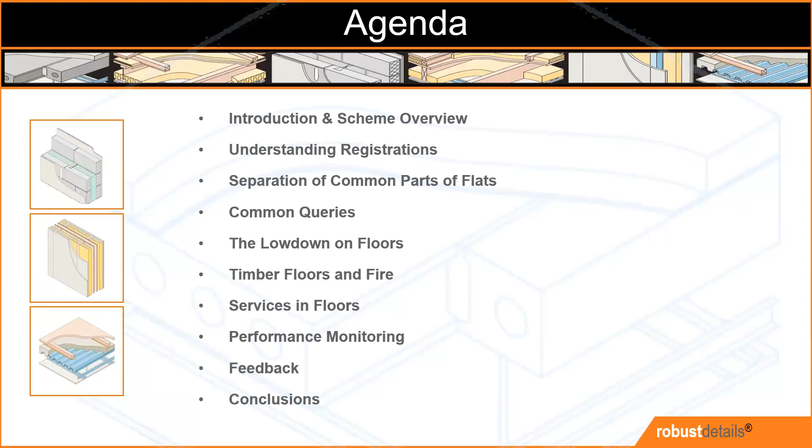So what are Robust Details? The Robust Details scheme standards are based around an average performance improvement of 5 dB over the minimum building regulations compliance standards recommended in Approved Document E, by testing an as-built system for conformance and conducting ongoing performance monitoring. Robust Details are able to offer an alternative to the pre-completion sound testing regime.

So the scheme can be used for newly built adjoined dwellings and flats only. It cannot be used to evidence compliance for conversions or extensions, and also not for student accommodation or care homes, unless they are categorized as flats in the building control purpose group assignment, commonly found in Approved Document B for fire safety. It covers Part E in England and Wales, but the same scheme can be used in Northern Ireland, as they have the same performance standards. There's a separate scheme for Scotland, as they have different performance standards. To give an idea, there are 69 details for England and Wales, and only 13 for Scotland.

This is a complementary service, so building control still needs to go to site to undertake the checks, as they would for any other aspect. We do go to site from Robust Details, but this is only to check that the details are performing so the scheme remains fit for purpose. While on site, we can do a bit of knowledge transfer, so we can tell the builder what he needs to do to comply with the detail, but we are not licensed or authorized to check for building regulations. It is still very much the job of building control to check compliance. And by that, I mean the plots have been registered and the construction meets the specification.

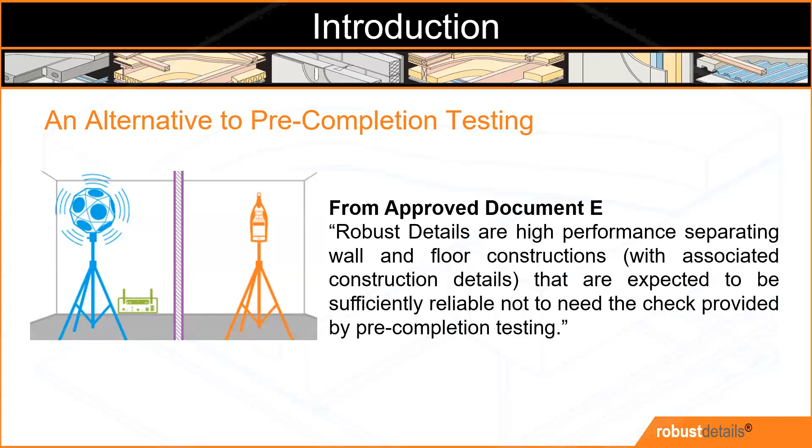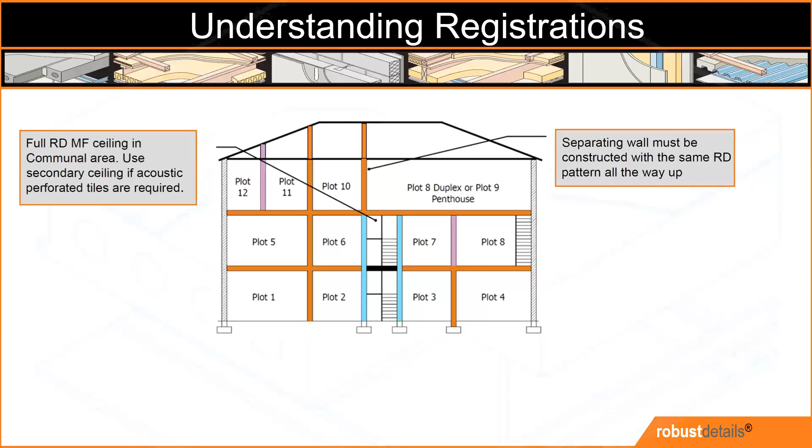So here we have an example. In a block of flats, we can expect to find other separating elements, which also need to perform in respect to the passage of sound, such as floors and walls between communal areas and the flats. These cannot be registered, but may sensibly be built following the robust detail specification to ensure we provide reasonable resistance to the passage of sound and also meet the flanking requirements at junctions with registered separating elements.

This diagram shows in orange those walls and floors subject to requirement E1 that can be built as a robust detail. Those in blue are walls to which the requirements apply. These could be built to a robust detail specification, but not registered. In this example, we also show walls in pink that are not compliant with the scheme standards due to their flanking conditions with separating floors.

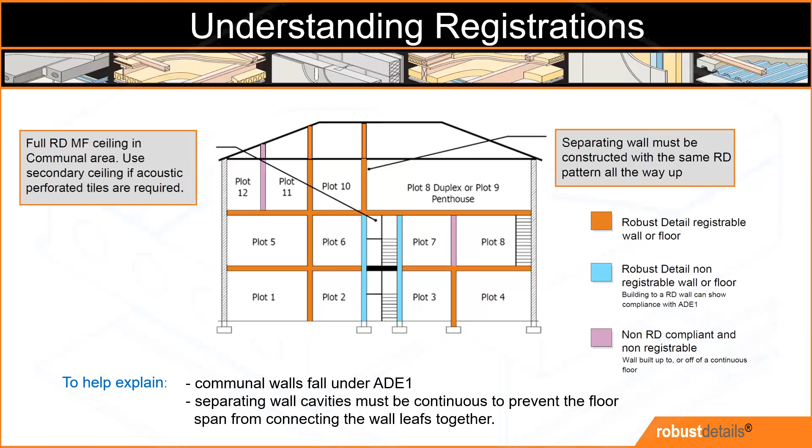Plots 7 and 8, as you can see, have walls that terminate at the underside of the separating floor, so it cannot be registered and instead should be subject to testing. The same principle applies to plots 11 and 12, where the wall is built off a separating floor. The next slide explains this in more detail.

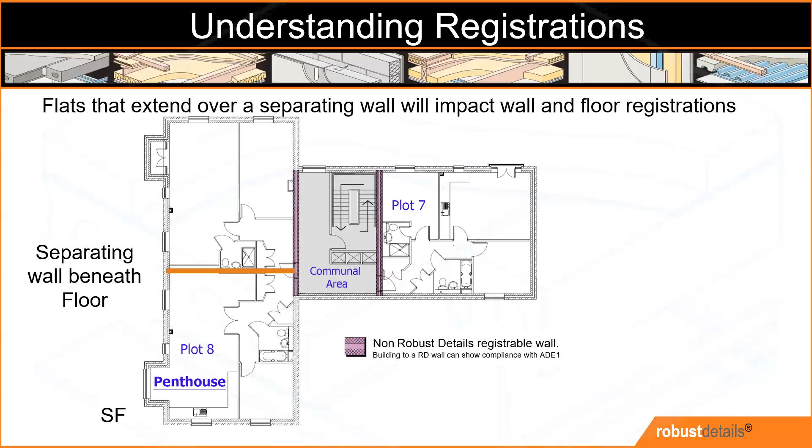As we just saw, a dissimilar layout between floor levels can cause situations where registrations to use the scheme standards is not possible. Separating walls with a continuous floor above are a good example of this. Here we have a top floor penthouse with a separating wall underneath. A floor which is continuous over a separating wall connects two leaves together. The floors can be registered with robust details, but you need to make sure the planks are tightly butted together and fully grouted.

By making our floor compliant and continuous above, we have, however, connected the leaves of our lower separating wall, introducing a flanking sound pathway around the wall. This wall cannot be registered and therefore needs independent acoustic design advice and testing.

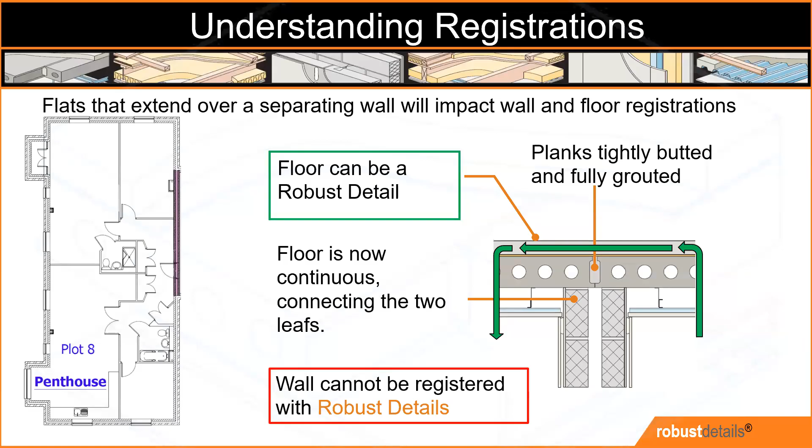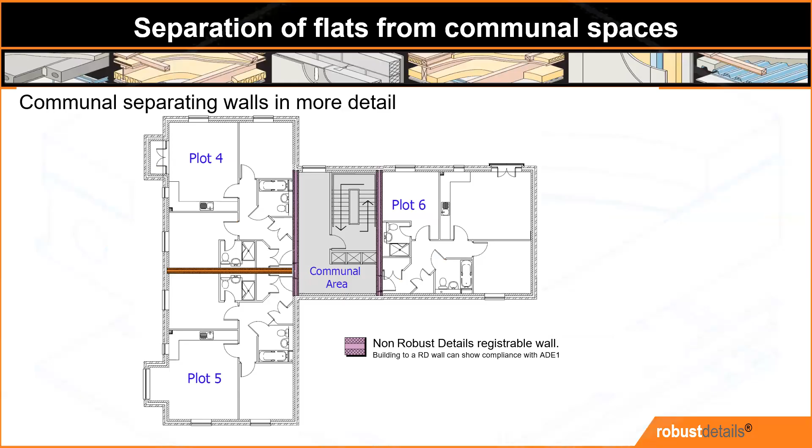So moving on to separation of common parts of flats. So there's a few misconceptions with communal spaces, which we'll talk about now. We mentioned earlier that separating walls between communal spaces and flats must meet a reasonable performance for resistance to sound, but cannot be registered with the scheme. The same principle applies to floors over the communal spaces.

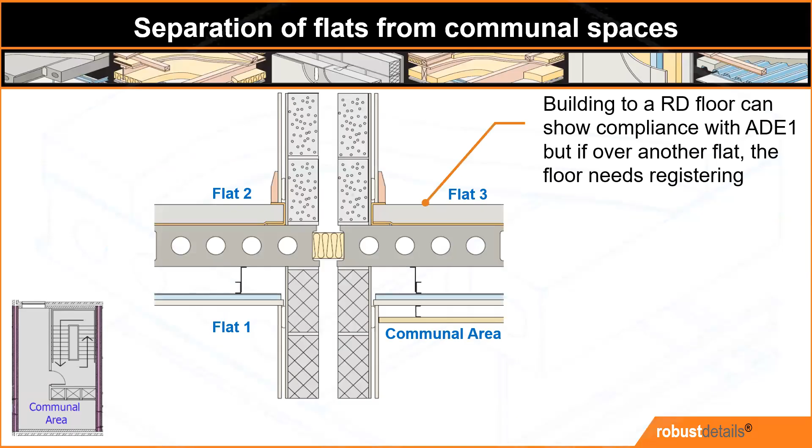Building a robust detail floor means meeting the flanking conditions at the abutment with walls, whilst also performing for sound resistance. Typically, we will need provision to limit reverberation in the common parts. Where this is applied to the ceilings, it should be in a metal frame grid mounted below the robust detail separating floor and not in substitute of any of the required ceiling treatments.

If a non-robust detail wall is used, it is imperative that the blockwork used meets the flanking requirements of the separating wall and floors. The example here shows that flat 3 extends above the communal area, therefore the entire floor needs to match the specification. As the separating floor has provided a natural break and protects from flanking sound, it would be possible to change to another wall type above the separating floor if desired.

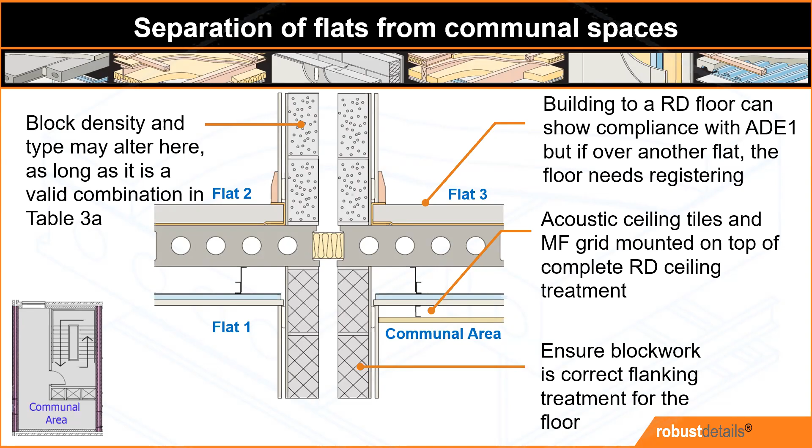Separating walls must be consistent between separating floors, but may change at these junctions, subject to compatibility being identified in Table 3A in the Robust Details Handbook. Right, at the beginning, we looked at the overall scope of the scheme and where it applies. Now let's look at some specific situations with common queries we receive in relation to these.

So mixed-use buildings. Requirement E1 says we need to protect against noise from adjoining dwellings and any other parts of the building, which would include the shops below. As we said earlier, robust details are for dwelling separation, so the podium deck between flats and shops would not be covered. You could then test this, but the shops are open plan.

The difference in sizes could make this difficult. If the noise from the shops is expected to be the same as from the dwellings, and the floor is built as if it was a robust detail, building control could consider this as evidence of compliance. Then we need to ensure that any walls built off the podium deck meet the robust detail requirements.

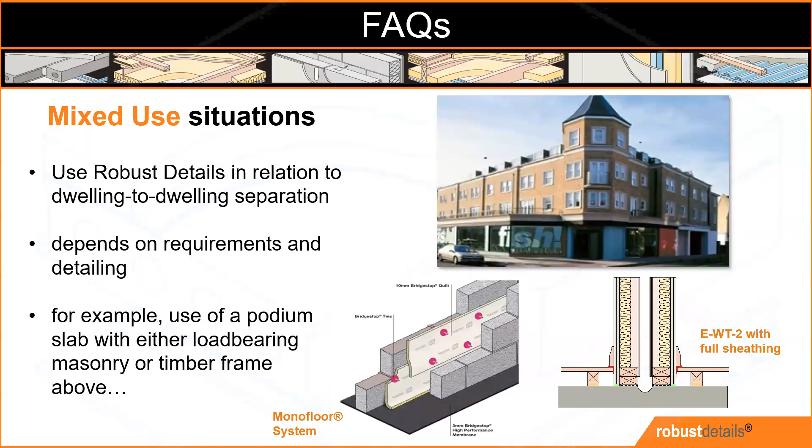Build a masonry robust detail separating wall off an in situ cast podium slab. We need to isolate the wall from the slab to prevent flanking sound transmissions. Appendix A2 in the handbook deals with the specific flanking conditions and includes a detail for using this Icopal Monarfloor Bridgestop system.

This consists of an isolating membrane between the slab and the wall and an acoustic quilt up one leaf of the wall for 2 lifts to mitigate against any debris forming an acoustic bridge across the wall.

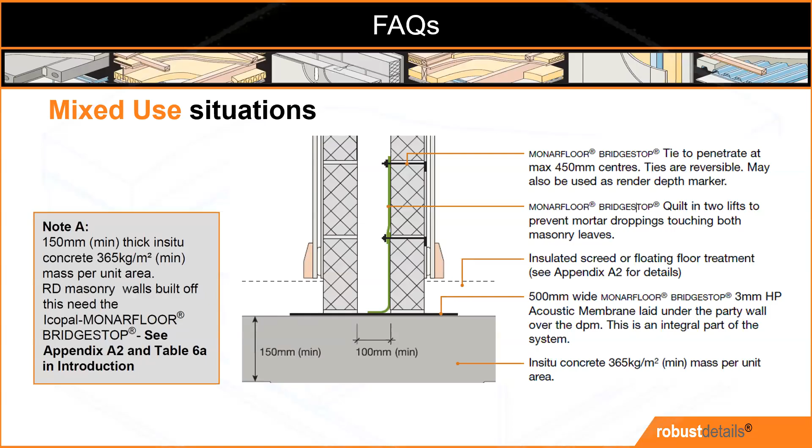Moving on to FOG units. This is a situation where there is a flat over garage that are different in ownership, so the floor is a separating floor. However, Part E doesn't mention garages, so building control bodies have to decide whether it's an external space or another part of the building where E1 will apply.

Because registrations are only applicable between dwelling plots, for a floor to be registered between a dwelling and the garage it would need to be demised to an identifiable plot registered with the scheme. In most situations, it would be likely that requirement E1 would be deemed applicable.

Keep in mind that to build a robust detail separating floor, the floating floor treatments and ceiling treatments specified must be installed. It is very difficult to conduct a sound test between garage and the flat above. So if an alternative to a robust detail is proposed, the method of evidencing compliance to building control will require individual consideration.

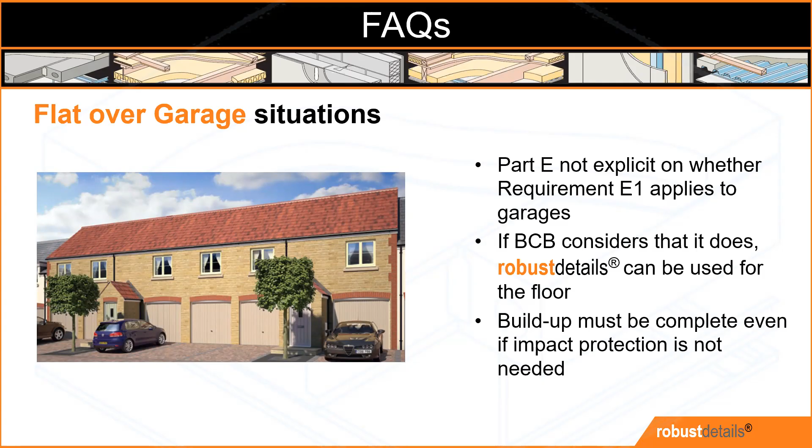Integral garages. If a wall is registered with robust details, as far as we are concerned, the whole wall has to meet the specification. With integral garages, there is a temptation to leave the finishes off, especially where gypsum board is required. If this is done, the wall will not be considered a robust detail in that area.

The designer and contractor will need to demonstrate that they have made reasonable provision to the passage of sound, again, accepting that it is very difficult to conduct a meaningful test through a garage wall, of course. Building control may consider that the full extent of the wall should reasonably perform to the passage of sound, and if so, the full surface finishes must be applied.

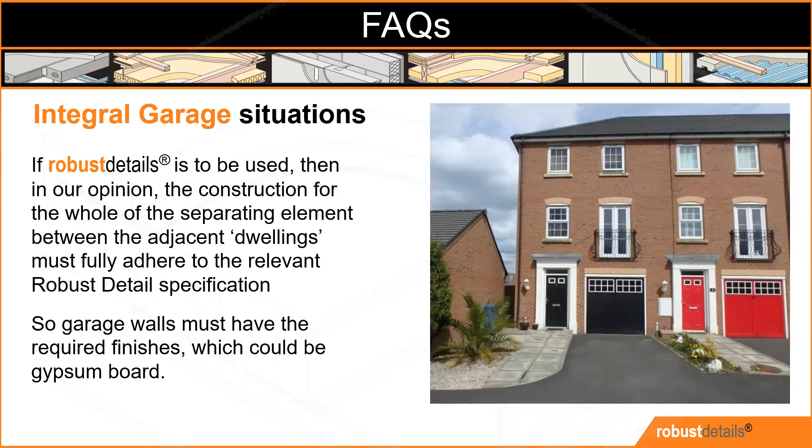In a similar way, the whole floor has to be built to the specification where level entry showers are fitted. The required finished floor treatment will be lost, and this can include large amounts of screed or flooring being missed. As bathrooms are so small, it's just about impossible to test to see the effect on performance.

So again, both the designer and building control body need to make a reasonable judgment on compliance, balancing competing needs of Part M and Part E. Where bathrooms are stacked in a vertical alignment, this negligible effect on performance may be easier to justify.

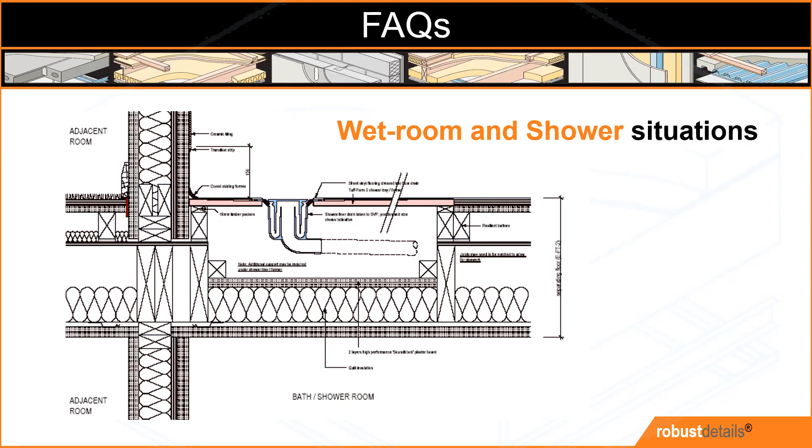Lowdown on floors. During past seminars, we focused on floors for good reasons, when they fail very badly. Screed isolation is such a key factor, but it's worth thinking about the construction build sequence in relation to non-load bearing internal partitions to ensure workmanship errors don't get formed.

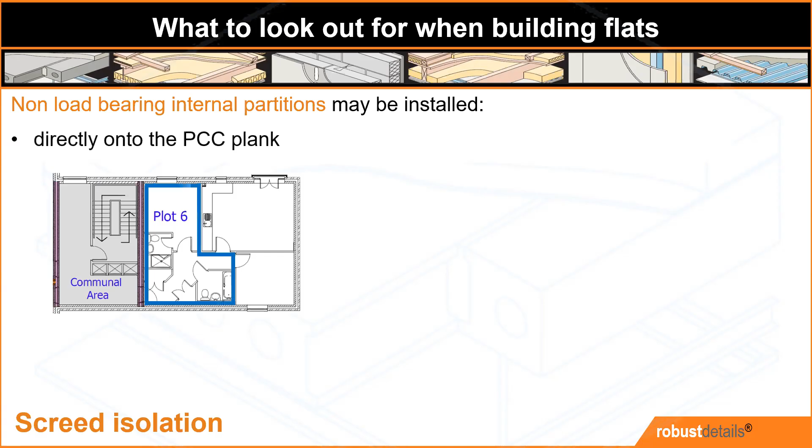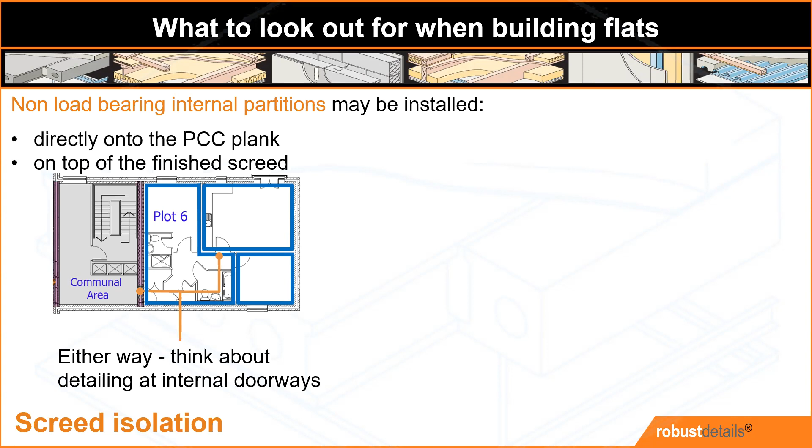Our top tip explains the internal walls can be installed on either the precast concrete floor or on top of the finished screed, or a combination of both. What differs here is where you install the screed isolation. Whichever way, think about the detailing at the internal doorways. Perimeter isolation or the flanking strip should extend into the internal doorways, entrance, door thresholds, and to any balcony doors.

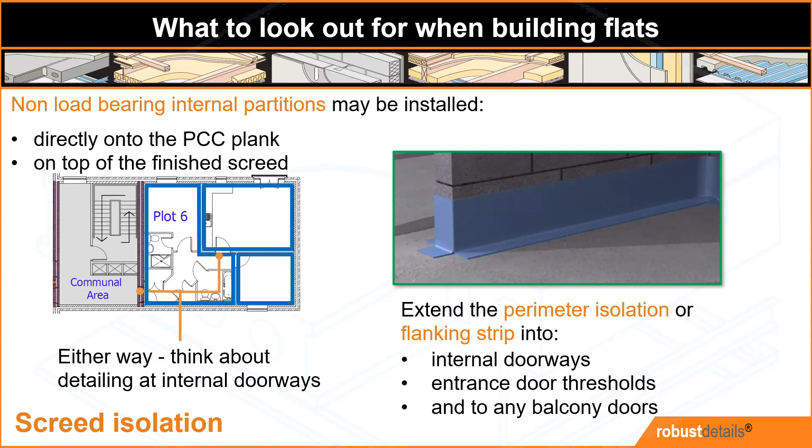Here we have an example of how it would be suitable to finish the screed isolation within an entrance threshold. You will note there is no isolation within the communal floor, as when it is not above an apartment, it does not have to protect against impact noises. This means the screed can be directly applied to the concrete planks.

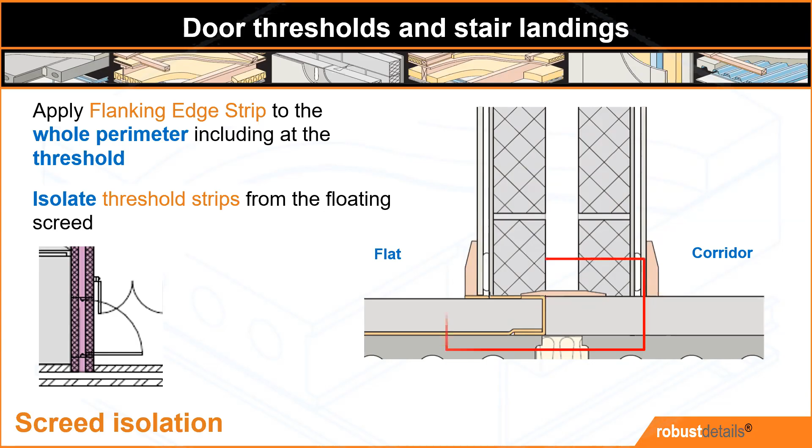It's good practice to prevent this impact noise tracking sideways into the apartment. So think about the type of cavity stops used between the corridor and the apartment. Also, if a door threshold strip is used, this should sit on top of the flanking edge strip, as you can see there in the diagram.

Full height windows or Juliet balconies are often detailed incorrectly, and as in this example, the resilient layer and flanking strip is left out. It's important to treat these areas as you would do for the remainder of the external walls. This means you extend the screed isolation into the reveals as seen here.

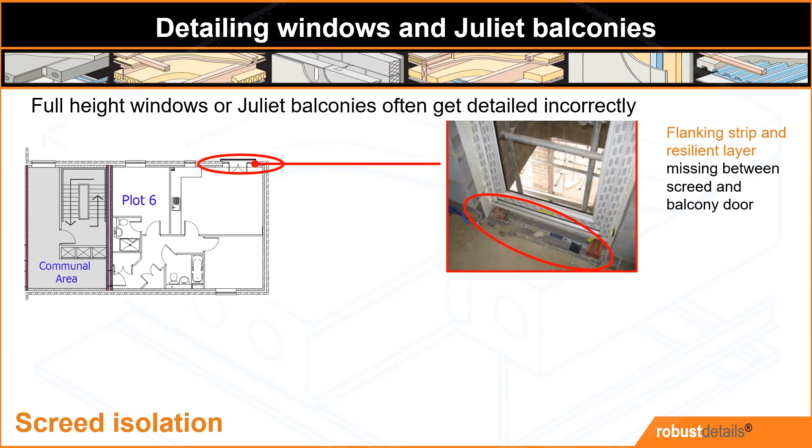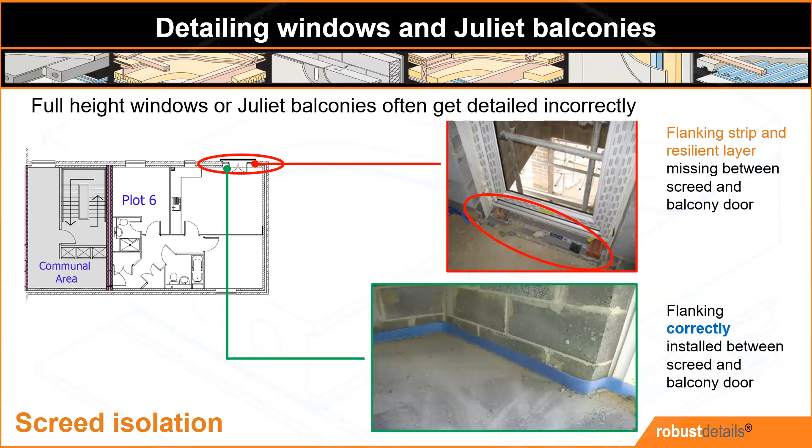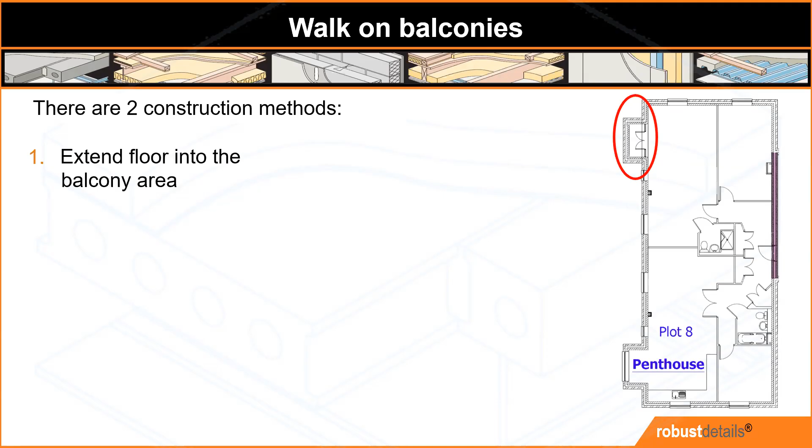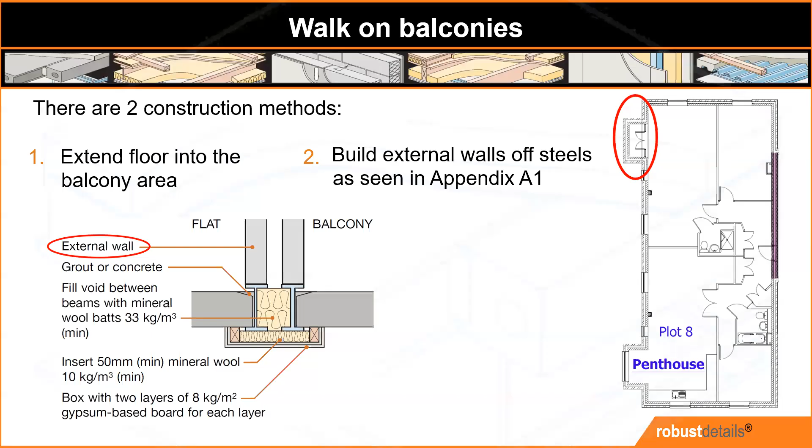On to walk-on balconies. Walk-on balconies can cause issues, and there are two construction methods you could adopt. You could extend the floor into the balcony area if this is above another flat, or you could build the external walls off steels as seen in Appendix A1, noting this provides for a boxing treatment with 2 layers of gypsum board and 50 mil of mineral wool. It is important to stress that steel beams can only be used in this way to support the flanking wall construction and never a separating masonry wall between dwellings.

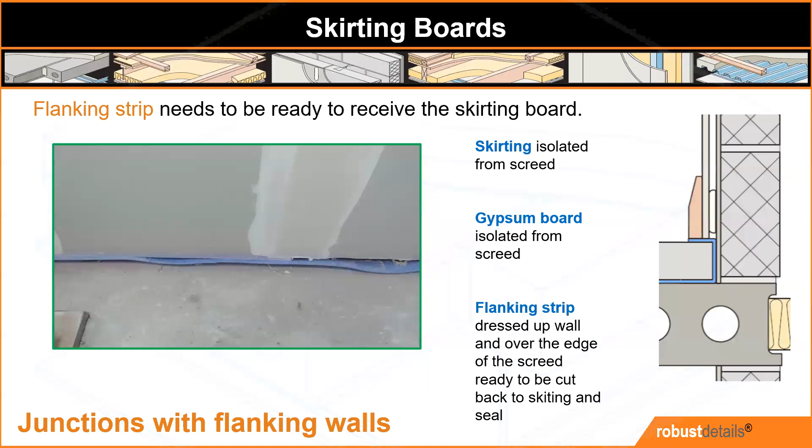Once we have everything in place, don't fall at the last hurdle and not complete the final stages of the floor specification. The flanking strip we left up the wall earlier is now ready to receive the skirting board. Both the skirting board and gypsum boards must not come into contact with the screed. So to do this, the flanking strip we dressed up the wall and over the edge of the screed gets folded down, ready to be cut back to skirting and sealed with a flexible sealant.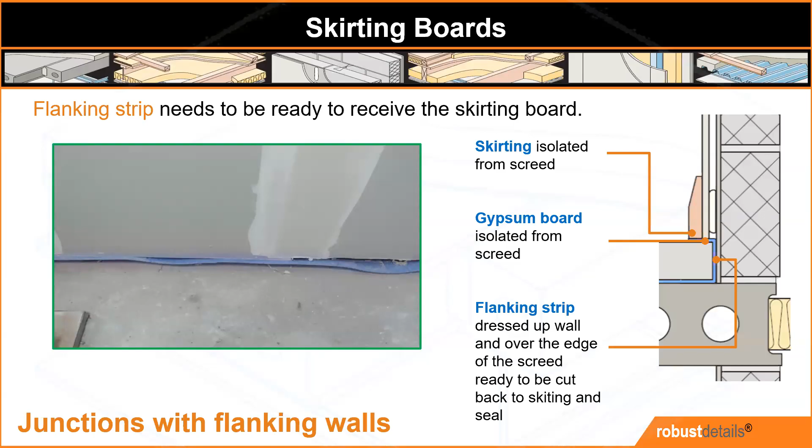Moving on to timber floors and fire. As a Part E scheme, we only get to see and access acoustic data, but this doesn't stop people ringing us on a regular basis to ask if Robust Details achieves 60 minutes fire resistance. Because materials in the floor buildup can come from multiple sources, it was difficult for any of the suppliers to commit to fire performance when they have no control over all of the components. So it's been difficult to obtain the required data, as you can imagine.

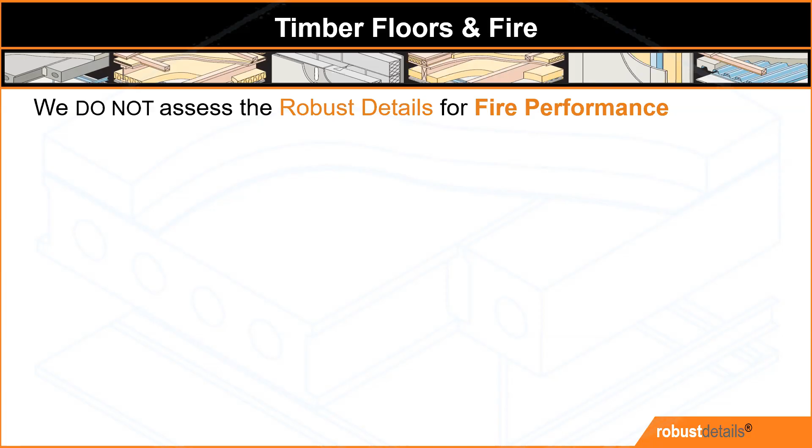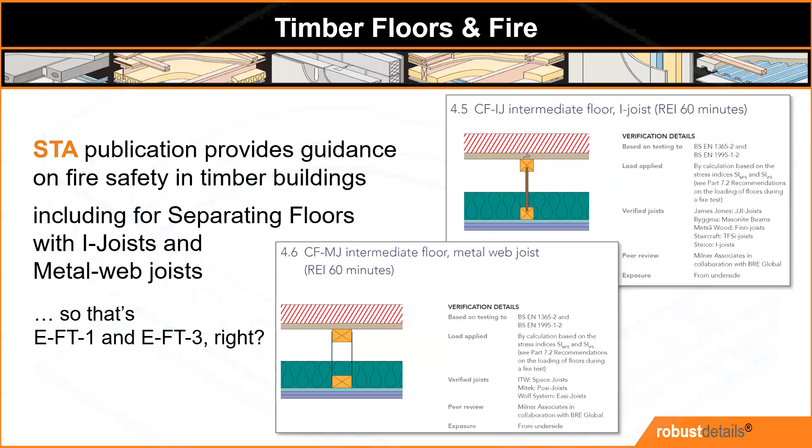Recognizing this, the STA has published guidance on how to construct for fire safety, and within this is how to demonstrate 60 minutes for separating floors. Guidance covers timber I-joists and metal web joists, which of course look like our E-FT-1 and E-FT-3. But if we look at the STA and Robust Details specs side by side, we can see they don't immediately line up. So does this mean that you can't meet both requirements without having to conduct some sort of test? No, not at all. If you select the components in the orange cells, these will meet the minimum specifications for both and will enable you to demonstrate compliance with Part B and Part E.

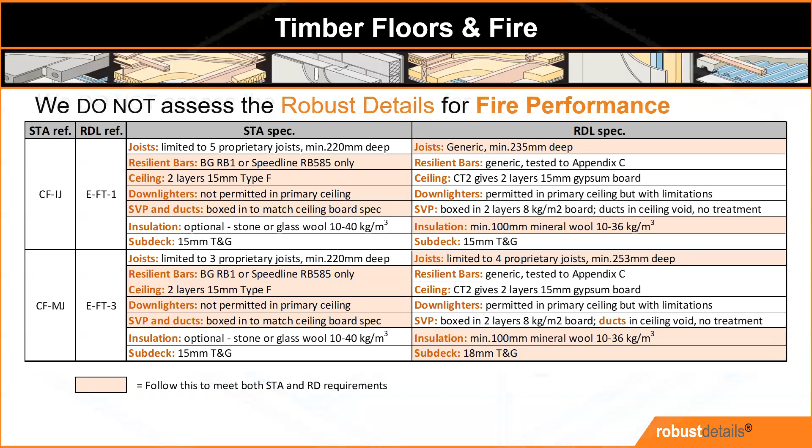One bit that's possibly worth pointing out is that the STA spec does not allow any recessed lighting in the main ceiling, whereas the Robust Detail does. However, a second ceiling can be introduced, which can be cut for the lights, and this will again meet both parts. Also, as we can see, both allow SVP penetrations. We just need to ensure this is done correctly.

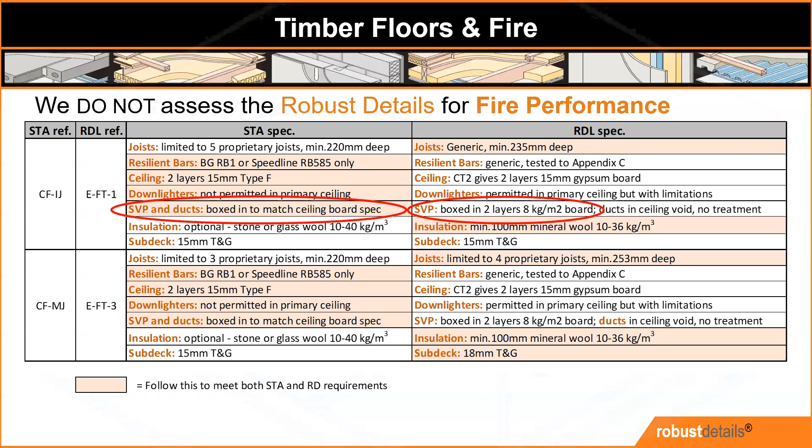Incorporating the requisite services in floors requires detailed consideration to ensure these do not compromise performance. Starting with SVP penetrations, the point of the treatment is to protect the hole in the floor. Noise breakout from the pipe is environmental. For those who work with floating screed floors, you will know the importance of isolating the screed from surrounding structures. They account for about 65% of failures.

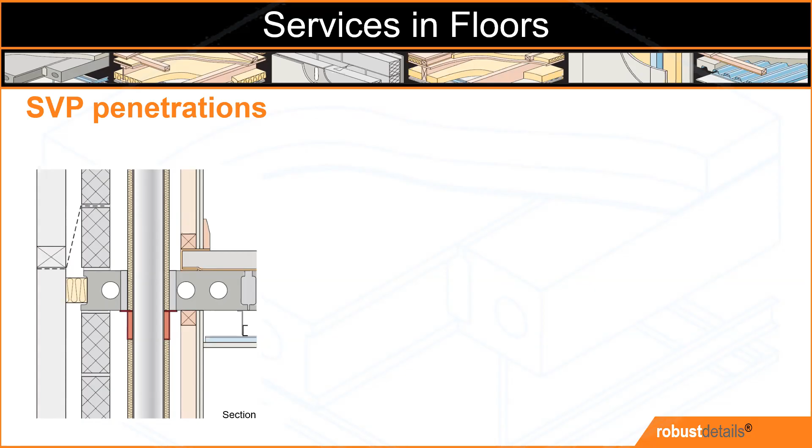When it comes to SVPs or waste pipes, the same rules apply. So we can see here that the screed is only touching the squishy stuff, so impact noise will not transfer. And of course, the same goes for floating floor treatments. Here are a couple of examples of incorrect SVP installation.

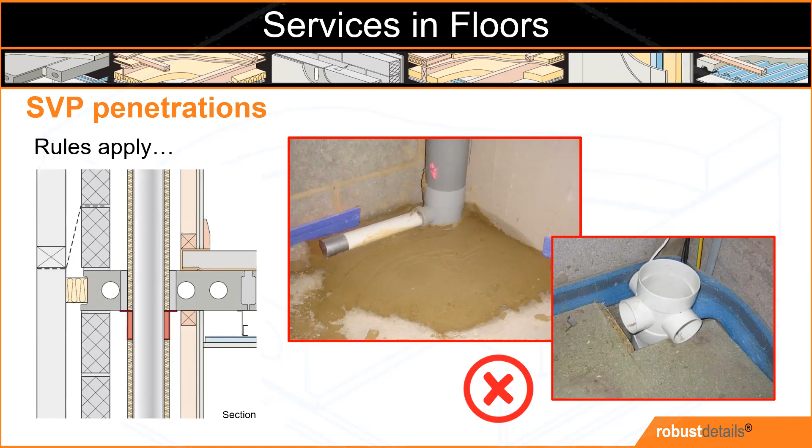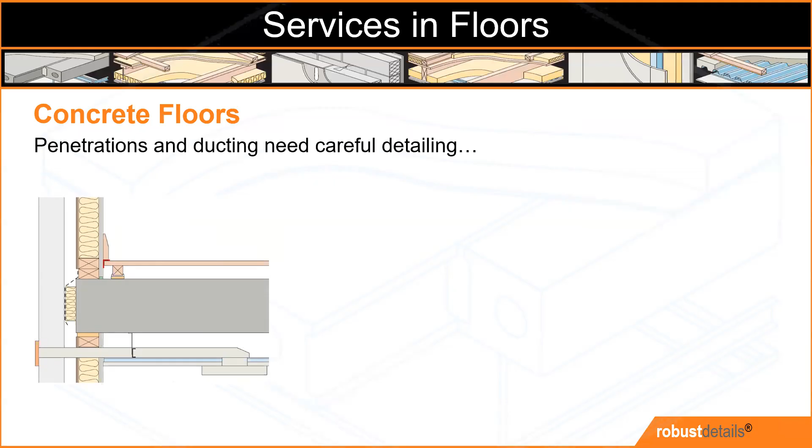Penetrations and ducting in concrete floors. Cabled services are generally not an issue. However, pipes or ducts need attention. If any drop below the ceiling, they will need to be boxed in with the same specification of ceiling board as provided for on the ceilings. Ventilation fans and their ducts must not connect the ceiling to the floor structure, to maintain the acoustic integrity of the separating floor. The noise of fans in operation is environmental and is not provided for within the building regulations.

Recessed downlighters can be installed in the ceiling at a density no greater than one per 2 square meters of ceiling area and at a spacing no less than 0.75 meters. Openings in the ceilings may be a maximum of 100 mil by 100 mil for this purpose. However, keep in mind the need to also demonstrate no detriment to the fire resistance of the floor. There are alternative options for compliance, including the use of a second ceiling or for manufacturers to conduct testing on the light fittings, in accordance with Appendix F, which is also in the handbook.

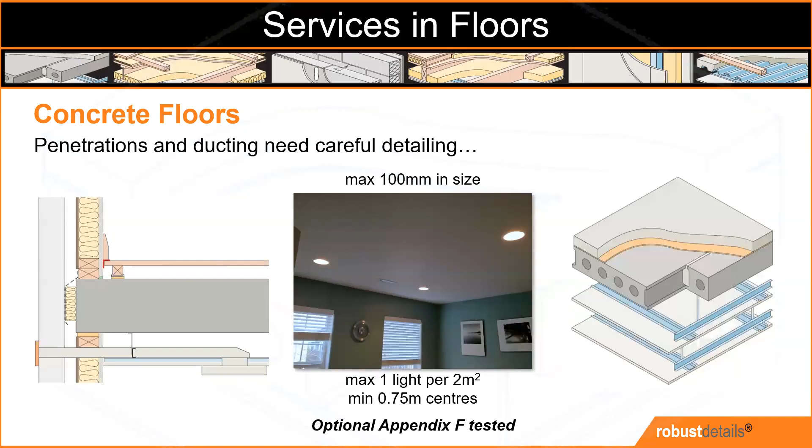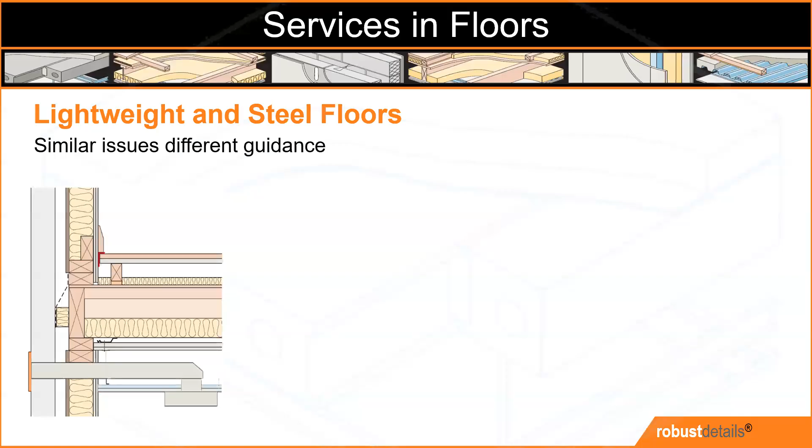Unlike those in concrete floors, any recessed lighting in timber separating floors must have been subject to testing in accordance with Appendix F. And the size and spacing limitations of 100 mil square or diameter and density of 1 per 2 square meters with 750 mil spacings is absolute. Services can run in the batten zone, and if the services need to go across the line of the battens, a gap of up to 50 mil is permitted in battens.

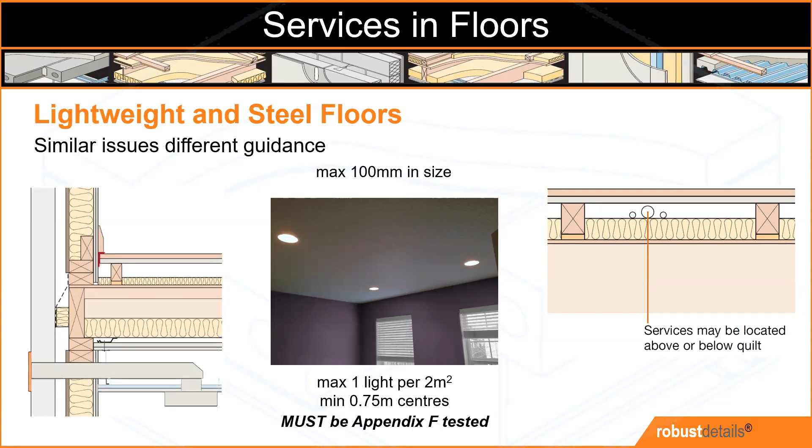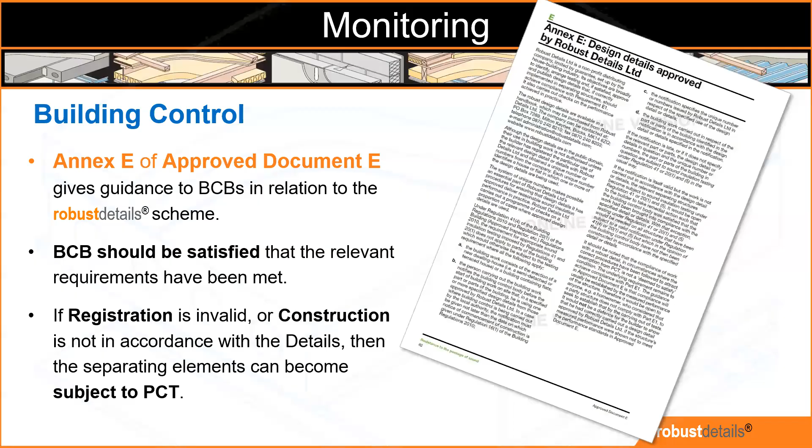So we said at the beginning that both building control and robust details can check the details on site. So let's start with the building control's responsibilities. Annex E at the end of ADE explains how the scheme fits in the building regulations and identifies the responsibilities. We mentioned earlier that builders need to notify building control before work starts on site. This is so the whole construction can be inspected. If notification is late, the building control body won't necessarily know what has been constructed, so they can ask for a test to prove the performance.

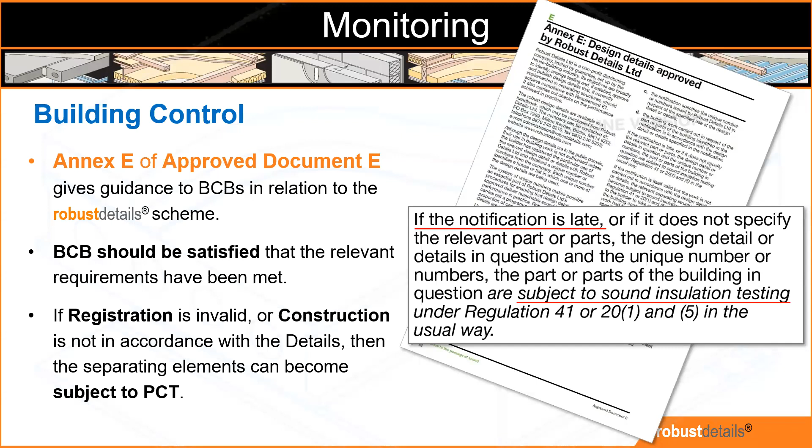If the building control body is confident that what has been built meets the robust detail specification, they could accept the late registration. If the construction does not match the robust detail specification, then the building control body can ask for a test, or if there's only minor deviation, they could ask for the remediation to bring it back to the spec. If this cannot be done to building control's satisfaction, they could reasonably ask for all separating elements to be tested.

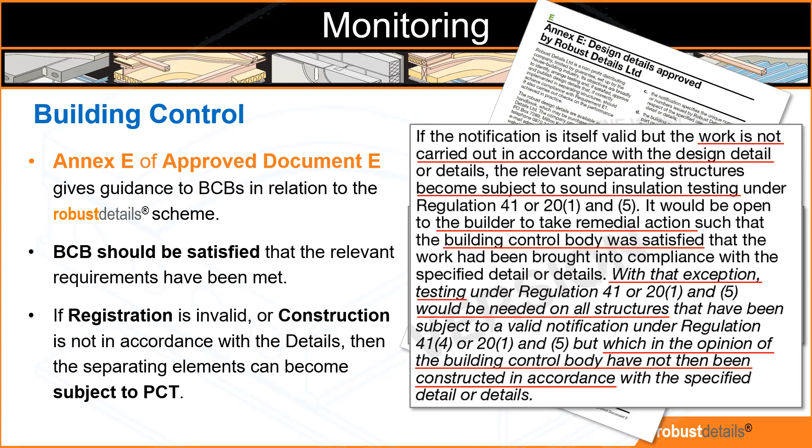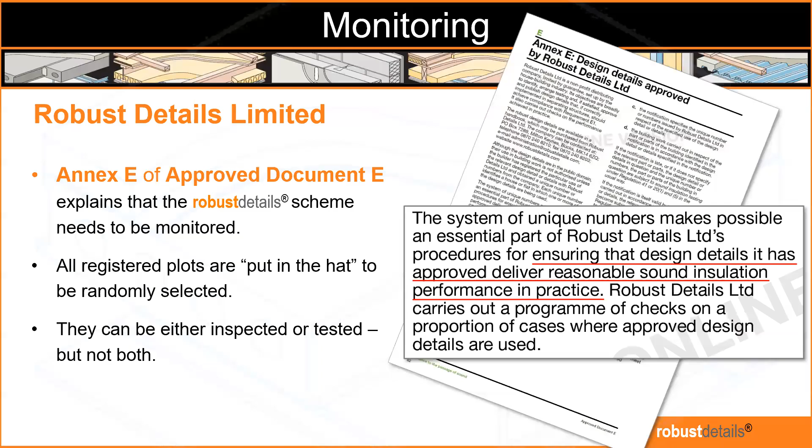Although we also visit site, this is to randomly sample registered plots, check that the details are performing as they should, and the scheme remains fit for purpose. We are not there to sign off for building regulations. To do this, we have independent consultants who do the monitoring for us, and this comprises 1% of registrations being subject to a visual inspection and report, and 2% of registrations being subject to a sound test at completion. So this is considerably less than the 10% recommended for pre-completion sound testing, and is performed predominantly for ensuring the scheme standards are performing as expected.

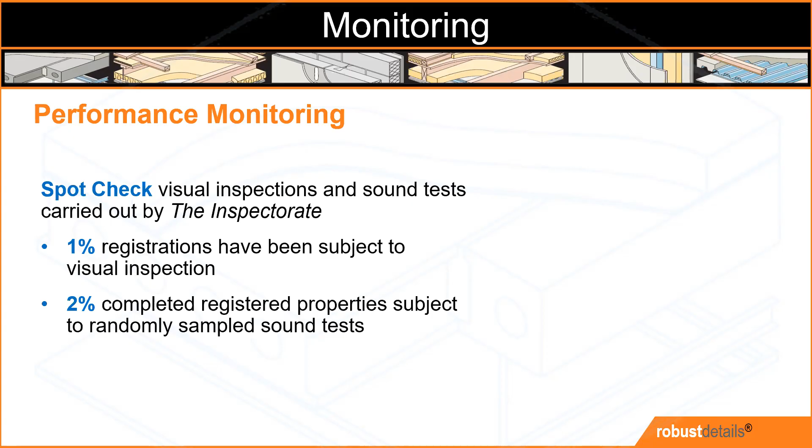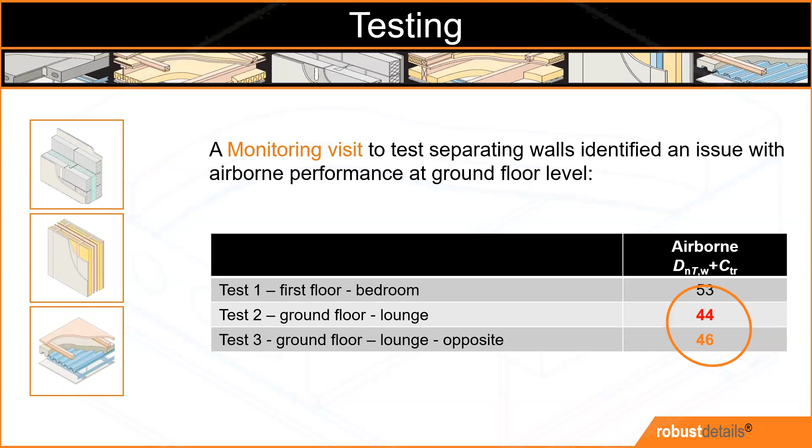Very occasionally, we will test a structure that doesn't meet building regulations minimum performance. When this happens, we will offer to conduct an investigation to try and determine the cause of the failure. Then even though we're not checking for compliance, if we do see this, we are obligated to notify the builder and building control. This is done by sending what we would call a red letter to the builder and BCB, and this identifies exactly where the failures occurred, as well as the probable cause. It is then for building control to decide what they want from the builder. As already discussed in Annex E, this could result in an increased regime of pre-completion sound testing on the project.

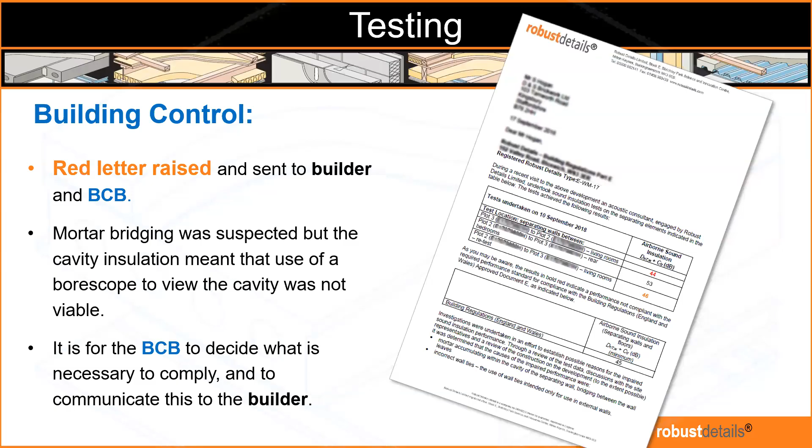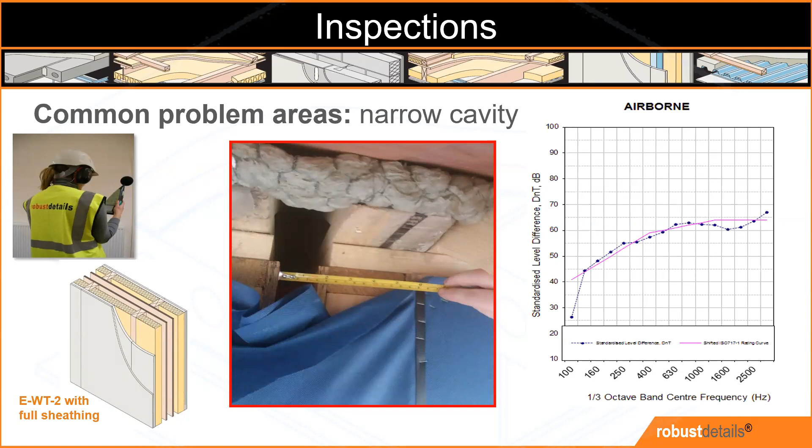The same thing happens if we see work in progress that is likely to underperform. In this instance, the cavity in the timber frame is only 40 mil instead of the minimum 50 mil. When we have tested walls similar to this before, there's been a characteristic dip at 125 Hertz due to the induced panel resonance. As this is at the low frequency end, it will affect the DnT,w and the Ctr calculations. So it's very likely to fail if it was to be completed and tested. So in the same way as the testing, we would draft a red letter and send it to the builder and building control. Then the building control body can decide if they would be satisfied with remediation or if sound testing would be required, all following the guidelines of Annex E.

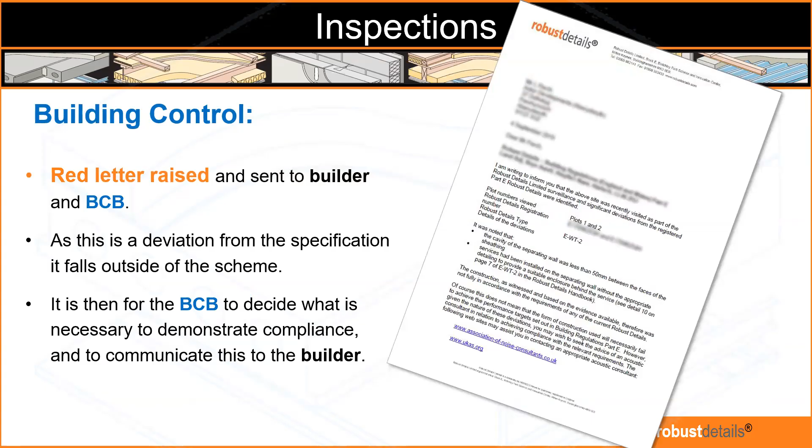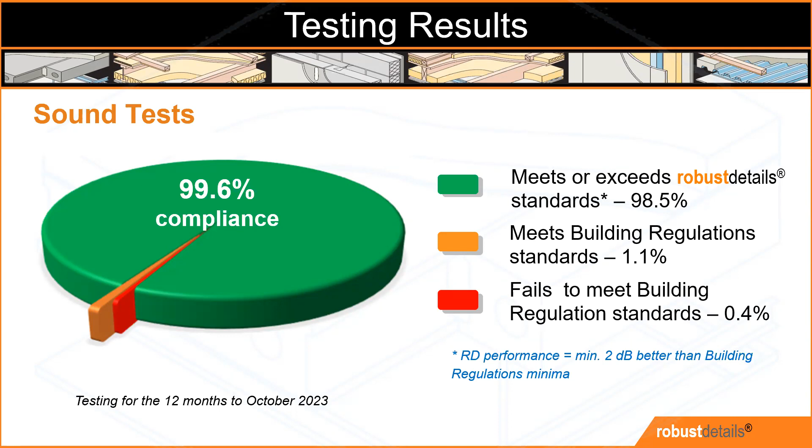So 99.6% compliance overall. Understanding the causes behind the ambers and particularly the reds is the key to helping further improvement. So that's how well the scheme does in terms of building control compliance, but what have the results from homeowners been? The builder is ultimately responsible for building a house that complies with regulation and is fit to be lived in. So that should be the homeowner's first contact. In 2022, the number of noise concerns equated to 0.02% of registrations for the period, with less than half of those being identified as airborne issues.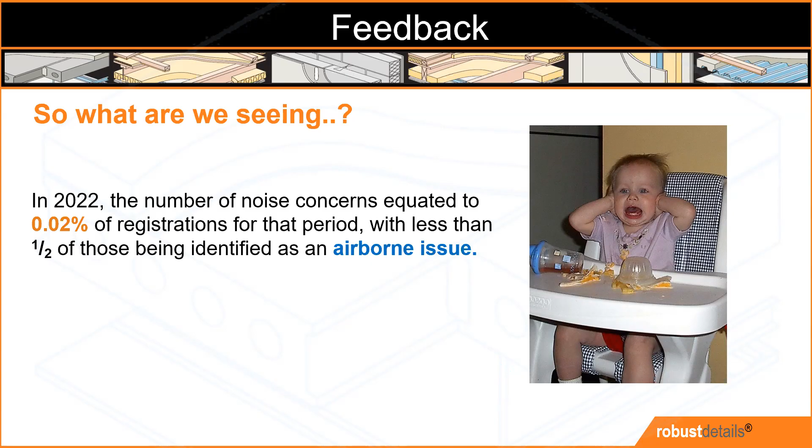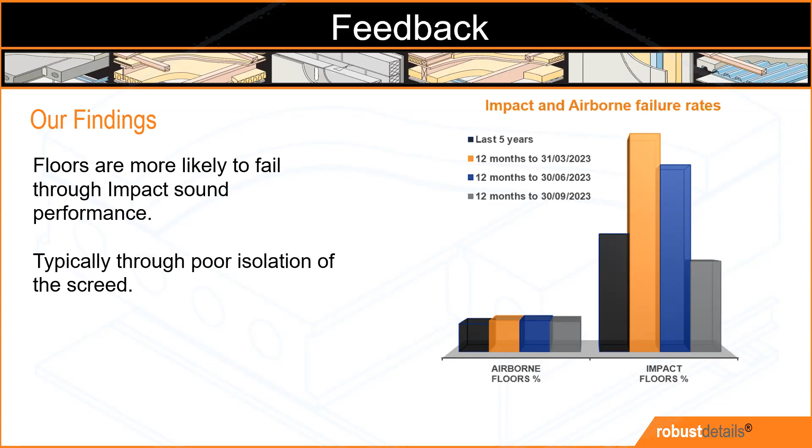It is important to use the performance data to establish any improvement and to understand what is happening on sites. You can see here that floors are more likely to fail than walls, and walls typically fail through cavity bridging. Breaking down the instances of failure in separating floors, we can again see the scheme shows impact noise is the main culprit. This data we use to target our efforts on improving understanding across the industry. Correct isolation of floating screeds is key to continuous improvement, so please forgive us if we keep labouring this point at every given opportunity.

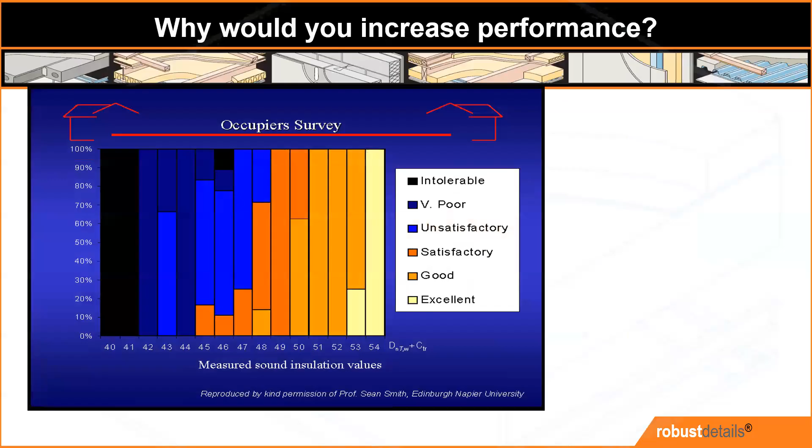So this concludes the technical bit, but it's always good to explain how we ensure the robust details perform. Edinburgh Napier University completed the occupier survey to capture homeowners' opinions, and the results are clear. At 45 dB, which for airborne sound is set as the minimum, over 80% of homeowners said in their opinion the performance level was very poor or unsatisfactory. But by adding just 3 to 5 dB to the airborne rating, 70 to 100% rate performance as good or satisfactory. We just want to point out this was pre-COVID, when working from home was at a reduced rate compared to today's trends. So we often get asked how to increase the performance of robust details now.

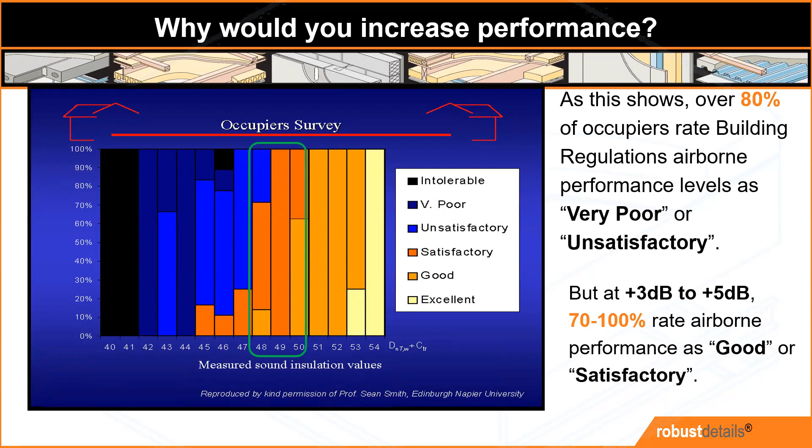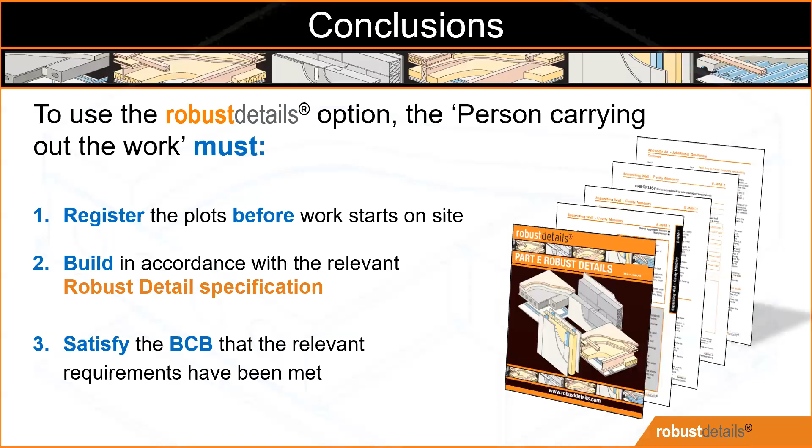So a final reminder, if you're using the scheme, the key is to register before work starts on site and make sure the details selected are compatible with your development. You must build strictly in accordance with those details. So make sure there are no conflicting specifications on drawings or unplanned product substitutions. Designers and contractors need to be able to evidence to building control that they have complied with requirement E1 by registering the plots and building to the correct details. Ensure the site teams are fully aware of the details and the checklist for compliance with those details.

In promoting best practice, our main source of information is the comprehensive Robust Details Handbook. You can also find a wealth of information on our website with animations, top tips, and newsletters. Suppliers with certain specified registrations will attend site and deliver toolbox training as a condition of their registration to ensure the site team know how to deploy the details correctly.

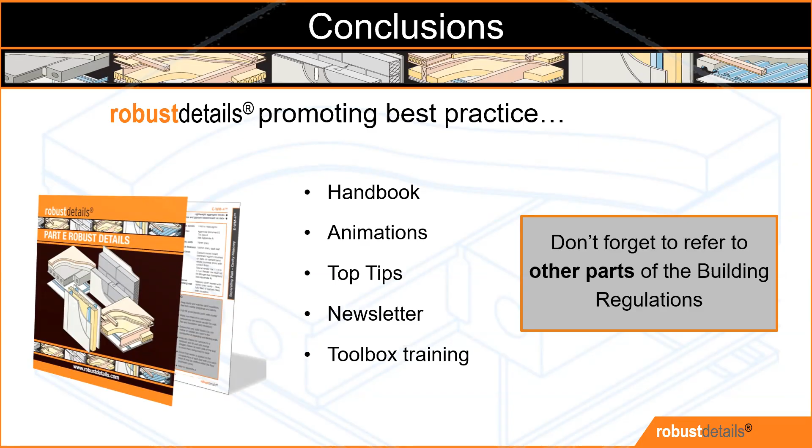So this is your opportunity, guys, to add in your questions so we can answer them live. We do have Neil Bodsworth. He said, regarding recessed lights in ceilings, would larger downlighters, say 115 millimetres diameter, be allowed if they are wider spaced? Yes, they would. So, as I said, in regards to downlighters and spacings, we do have the exact information you need within the handbook. So if you have a look at the handbook by downloading it on the website, you'll have all the information required for that.

Okay. Any more questions, anybody? This is the time to ask them, otherwise I can send them a bit later. Zim here, would you be able to send the presentation across? It is very useful to know. No problem at all. Okay, so we don't seem to have any more questions. They may come a bit later.